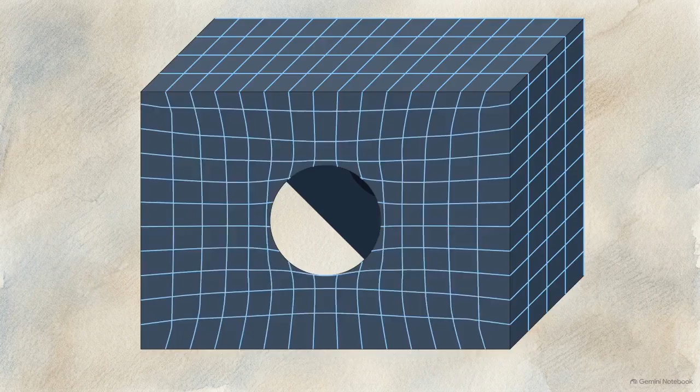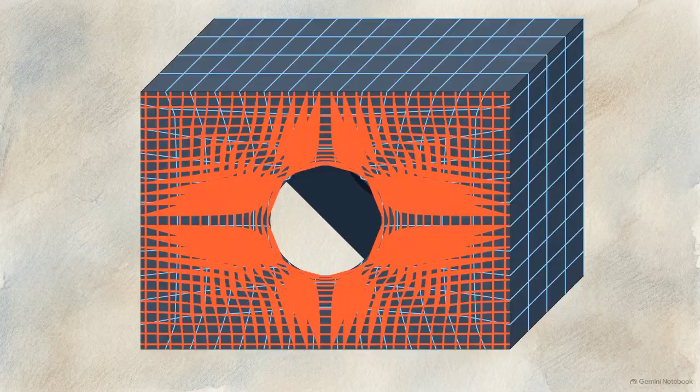Deep underground, the solid Earth exists as a perfectly balanced system, holding immense compressive force in physical equilibrium. The exact moment a tunnel is excavated, that equilibrium is destroyed. The stress violently diverts and concentrates around the newly created void. Geotechnical engineering is the discipline entirely focused on managing this massive redistribution of force.

The sole objective is to calculate how the rock will behave, ensuring these artificial voids remain safely stable throughout the mine's operating life. When we apply this to the massive surface footprint of an open-pit mine, these physical principles operate across entire landscapes. Here, engineers face a strict economic paradox.

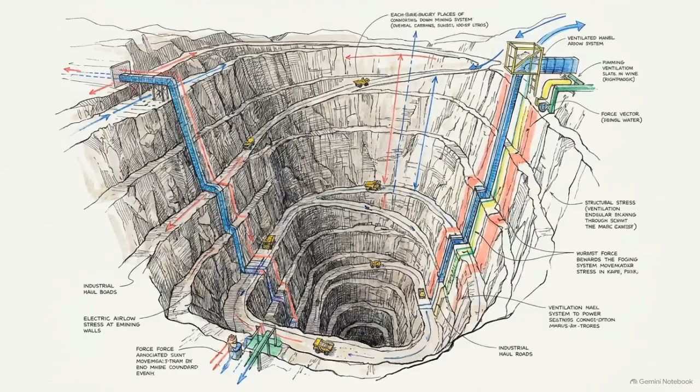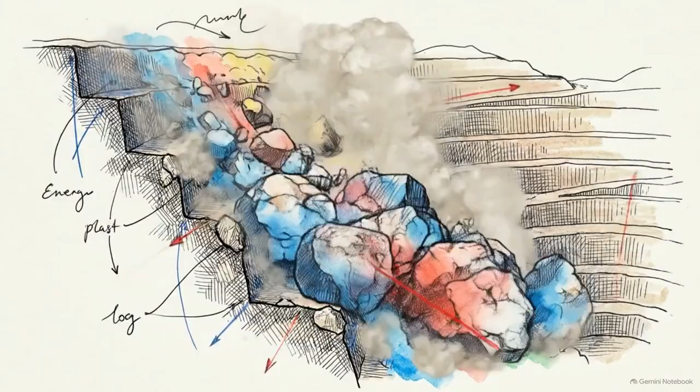Designing excessively gentle pit walls wastes time, burying highly valuable ore under tons of useless dirt. To be profitable, they are forced to push physical stability limits to the absolute maximum. As a result, geotechnical design is a continuous, high-stakes mathematical tightrope walk, balancing maximum economic extraction against the constant threat of a catastrophic collapse. In an open-pit mine, the pit wall's angle is the most important variable dictating profitability.

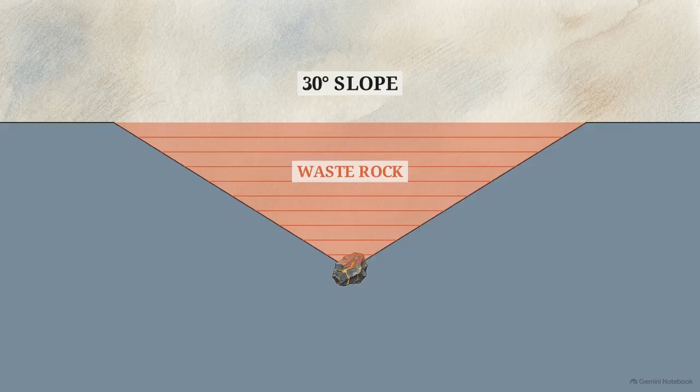This cross-section compares two pit profiles. A shallow 30-degree angle requires excavating and hauling away a massive, unprofitable volume of worthless dirt just to reach the ore body at the bottom. A steep 60-degree wall saves millions of dollars in extraction costs, but it inherently increases the risk of the rock collapsing under its own massive weight.

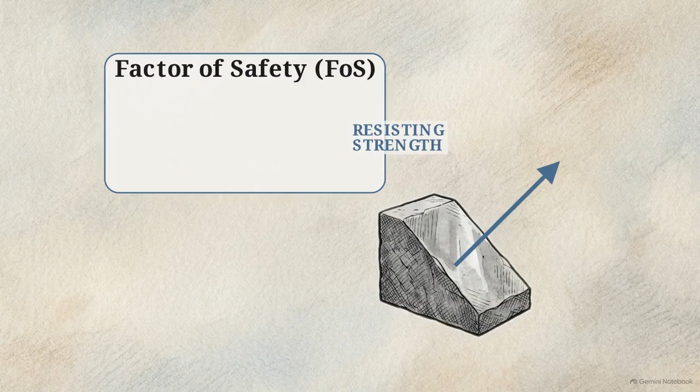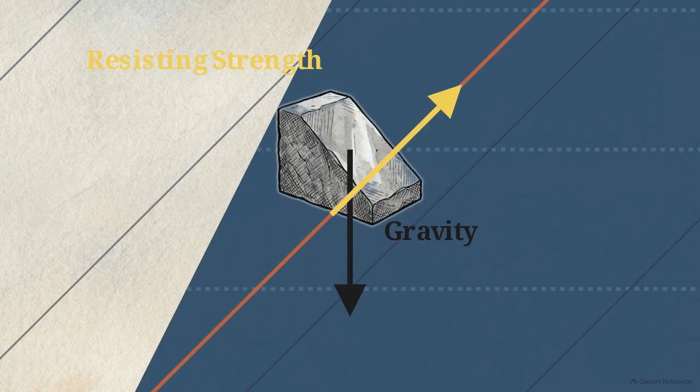This diagram illustrates the metric engineers use to quantify that collapse risk, the factor of safety. It directly compares the resisting strength of the solid rock against the downward driving force of gravity. But rock is rarely a uniform material. Pre-existing geological structures, like faults and bedding planes, create weak surfaces that heavily compromise the resisting strength of the pit wall. The most critical variable capable of destroying a slope's factor of safety is groundwater.

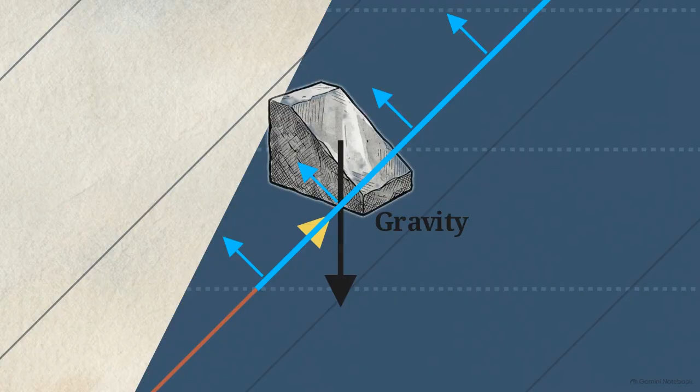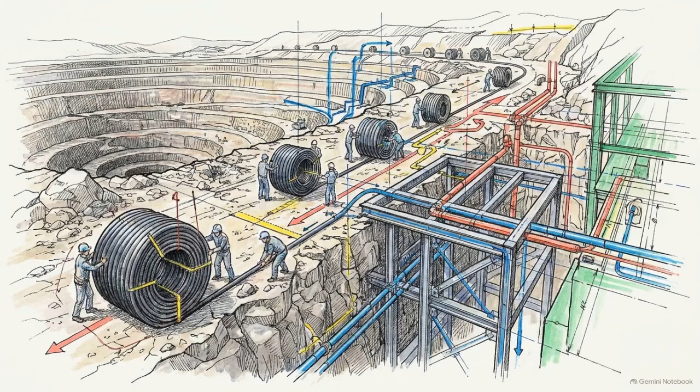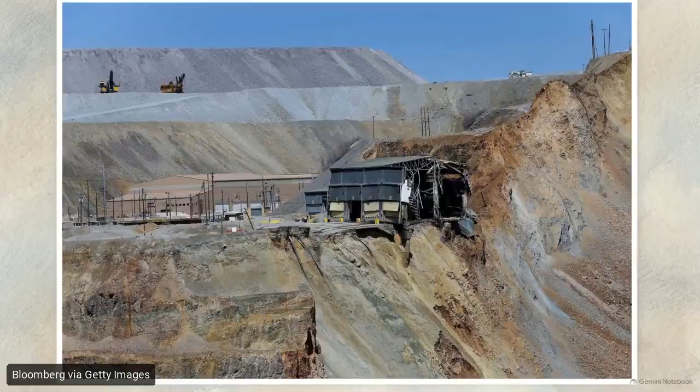When water pressure fills these tiny fractures, it physically pushes the rock apart. This outward hydrostatic pressure drastically reduces the rock's effective resisting strength until gravity takes over. To counteract this, active engineering interventions are required. Mines deploy massive networks of dewatering wells using heavy industrial pumps to drain internal water pressure before it compromises the wall. Even with extensive modeling and dewatering, miscalculating the factor of safety results in total infrastructure loss.

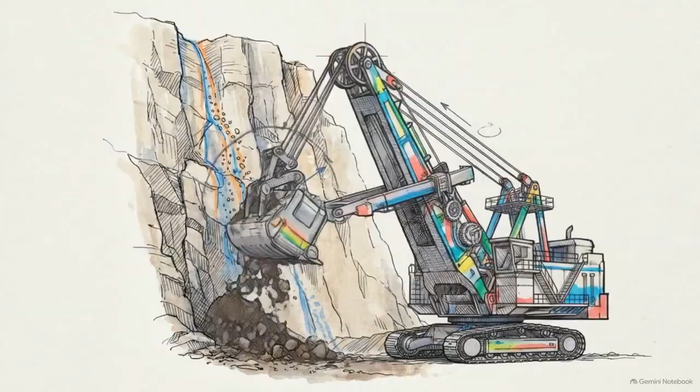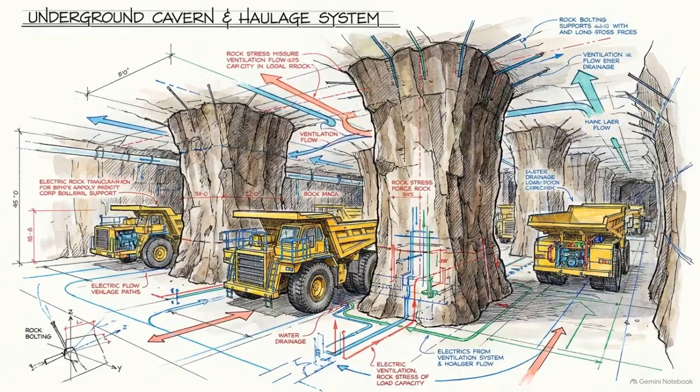Surface mining is a relentless battle against gravity and water pressure, won only by mathematically pushing the rock precisely to its safe limit. Deep below the surface, extraction occurs entirely within the rock mass, and the structural rules change. The primary mechanism for preventing total collapse underground is leaving unmined columns of rock, pillars, to carry the crushing weight of the earth above. This is the tributary area method.

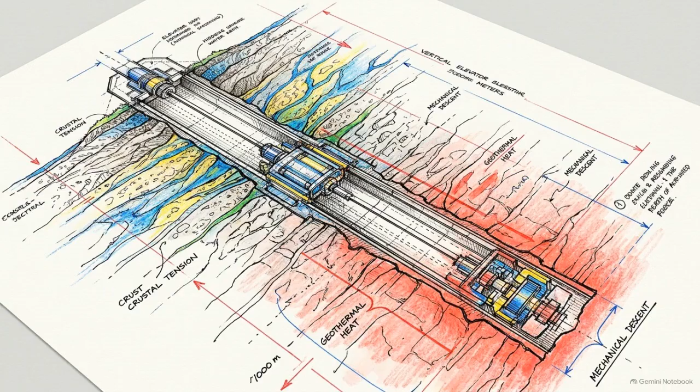Mapping a grid over a mined area estimates the load a central pillar supports. Survival depends on rock type and width-to-height ratio. If it becomes too narrow, the overhead load causes it to bow and fracture outward. This mathematical balancing act becomes exponentially harder as a mine goes deeper. At extreme depths, naturally occurring rock stress builds to levels capable of causing violent, explosive failures.

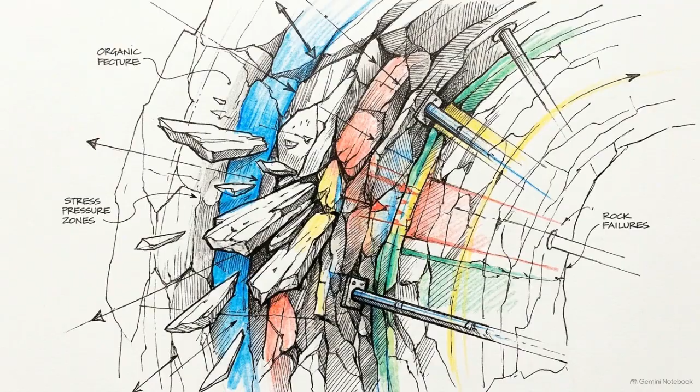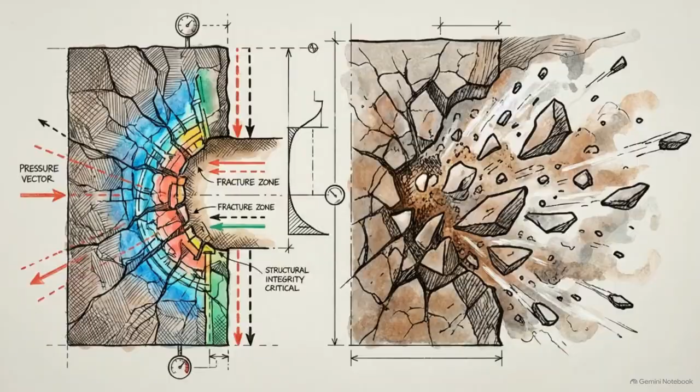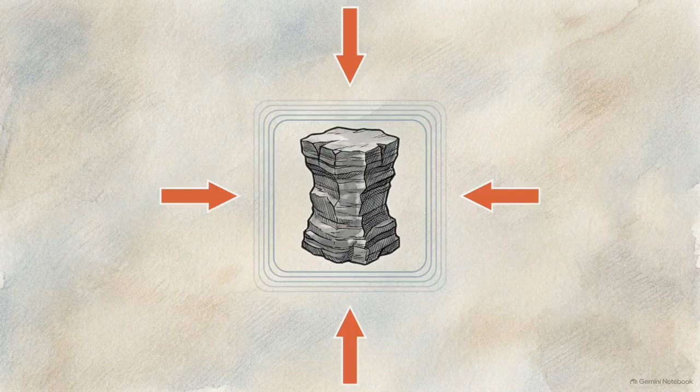This is a rock burst. Under extreme stress, solid stone can fail suddenly and completely, occurring without the gradual warning signs you see on the surface. While surface pits manage top-down gravity, underground engineering must build structures capable of surviving extreme, multi-directional crushing pressures from the earth itself. Large pillars hold up the macrostructure of the mine, but the immediate roof directly above the miners requires its own engineered support.

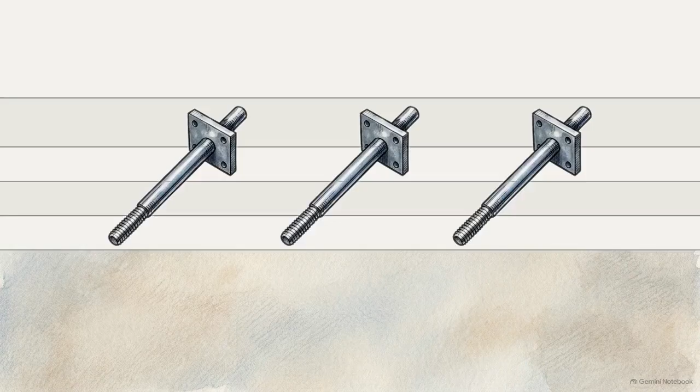Immediately after an excavation is blasted, flat horizontal layers of rock in the newly exposed ceiling begin to separate under gravity. To stop this separation, steel rock bolts are drilled upward, binding these weak, distinct layers back together. Clamping the strata tightly, the bolts transform loose, dangerous rock into a thick, self-supporting structural beam. A secondary layer of shotcrete, a sprayed liquid concrete, is then applied to seal the face and prevent smaller fragments from flaking off. The consequences of failing to properly install these roof support systems are immediate and highly visible.

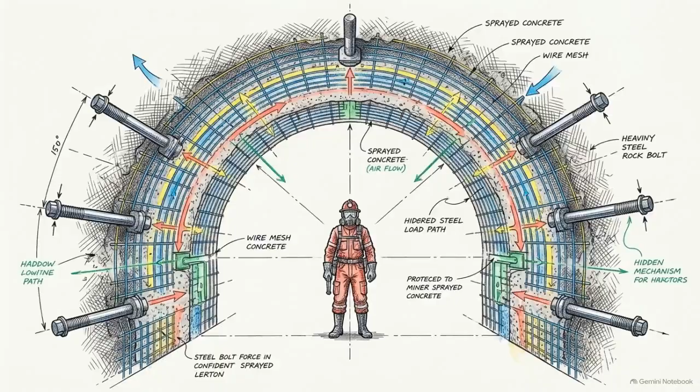Micro-level support is just as critical as the macro-level pillars. It works by ingeniously turning the fragile rock mass into its own structural reinforcement. Pulling back to view the entire mining operation, it is clear that geotechnical stability is never a static calculation. Because a mine is constantly growing, every single new blast permanently alters the stress distribution throughout the surrounding rock mass all over again. Geotechnical engineers must constantly update their stability models to reflect this expanding reality.

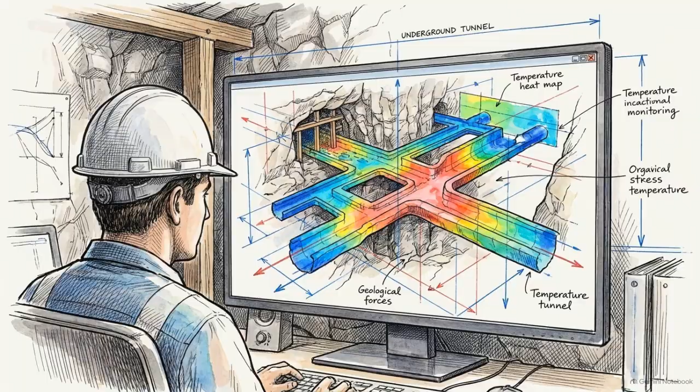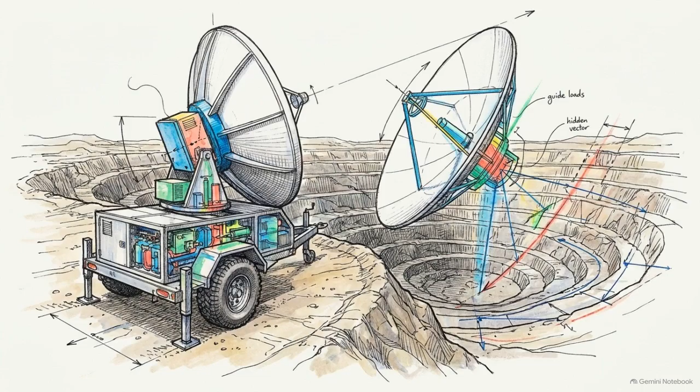They verify these models using physical instrumentation embedded deep in the rock, using extensometers and stress cells to track hidden movements. On the surface, radar arrays constantly sweep the pit walls, tracking shifts down to the exact millimeter. This surveillance provides the critical early warning window required to evacuate heavy equipment and crews before a stressed slope or pillar gives way. Preventing catastrophic failure is a daily, unyielding priority that dictates every single phase of a mine's operating life. But securing the excavation is only half the battle.

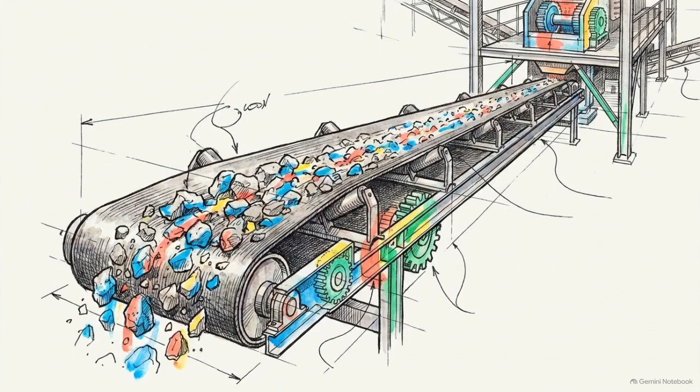The rock we've safely extracted must now be turned into profit. In the next episode, we move from the physics of extraction to the chemistry of processing, covering the strict fundamentals of crushing, grinding, and flotation.

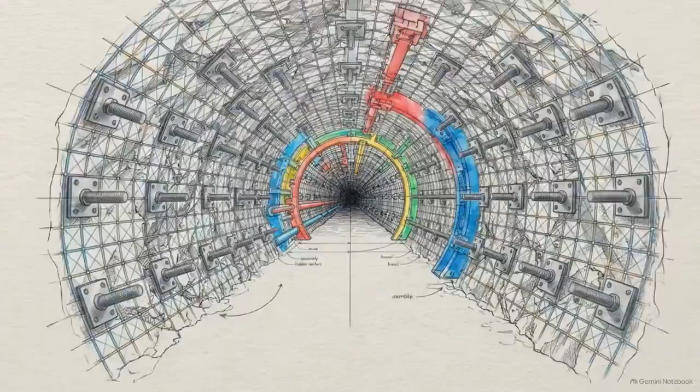Geotechnical engineering is an active, never-ending optimization loop. It proves that a void is never empty. It is a carefully managed architecture of opposing forces.